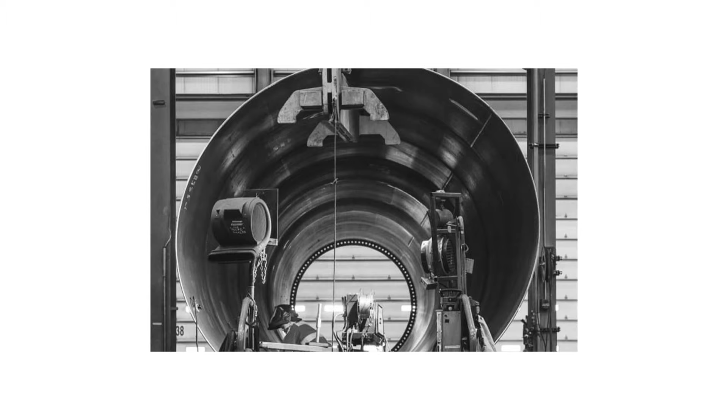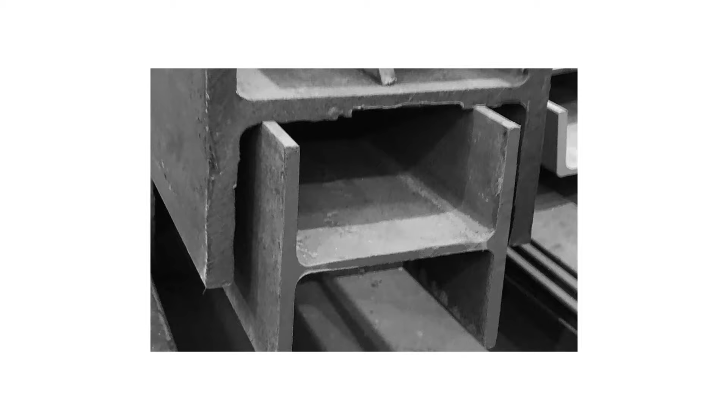Our thesis begins at this global scale, by exploring the complex networks in which steel is embedded. The goal of this project is not the impossible task of exposing every detail of these tangled histories, but to question steel's material dominance around the world. This investigation is conducted through the lenses of 3 steel beams. While these beams are unique in their constructions and their contexts, they are all part of the tangled web of steel.

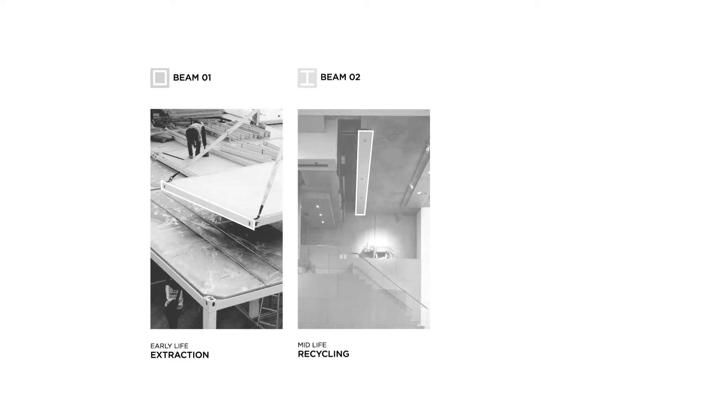The first story foregrounds geological and geopolitical issues of extraction. The second explores low-carbon methods of production and reproduction. The third examines the human and economic costs of the steel life cycle. We combine methods from scientific research and scenario planning to develop a speculation for each story, all sited 50 years in the future. These scenarios expand beyond the lenses of their singular beams to explore the complex networks of our ever-changing and challenging environment.

GBT 16270 was an extruded steel frame in the Huoshenshan Hospital in Wuhan, China, constructed as part of the government's response to the COVID-19 pandemic. It formed one of the many prefabricated panels that supported the 1,000-bed hospital, one of hundreds of large-scale infrastructure projects that the Chinese government undertook that year. China alone accounts for 51% of global steel demand, producing 996.3 million tons of crude steel, or 0.69 tons per capita per year.

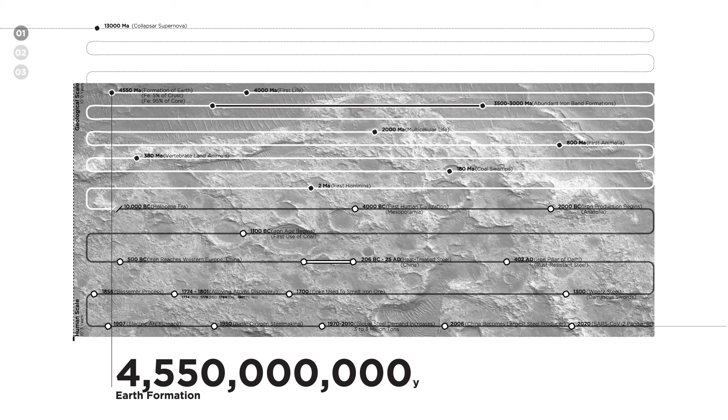16270 began a lengthy journey to unite itself 13 billion years ago, when a star 50 times the size of our sun collapsed. In the final hours of this supernova explosion, iron and carbon, the fundamental building blocks for steel and human life, were forged. 4 billion years ago, these elements were united with the formation of the Earth, but they were not so evenly distributed across it. Carbon, in the form of coal, is both an essential fuel and a key reactant in the fabrication of structural steel. In 2019, the steel industry accounted for 15% of worldwide coal demand.

2 billion tons of iron ore and 1 billion tons of metallurgical coal were used to smelt 1.7 billion tons of crude steel. By 2020, China had become the largest producer of coking coal in the world, generating over 4 billion tons per year. The coal for 16270 originated primarily in China's Haerwusu mine in the Inner Mongolia Autonomous Region, just one of the many water-stressed areas that supply 83% of China's growing coal demand. The remaining 10% originated in Australia, which supplies 55% of Chinese coal imports. Even before its formal creation, the raw material and power source needed to form 16270 had already traveled over 22,000 kilometers and passed through 5 customs checkpoints.

On a molecular level, 16270 crossed many more borders before it united in Wuhan. 6 months before the light gauge frame was formed, its backbone was extracted from the earth in the form of virgin hematite. The black rock was pried from a vein in Australia's Roy Hill mine, a minuscule fraction of the 930 million tons of iron ore that the oceanic nation produces each year.

Like most resources, 16270's ore moved along geopolitical channels. It was transported by BHP Group, one of the 4 companies that control 70% of the 2.35 billion ton global iron market. The ore was loaded onto a barge and shipped to China's largest port, the port of Shanghai. From there, the container was shipped 941 kilometers west up the Yangtze River. Finally, in the manufacturing center of Anshan, in Liaoning, 1 part iron united with 1 part coal.

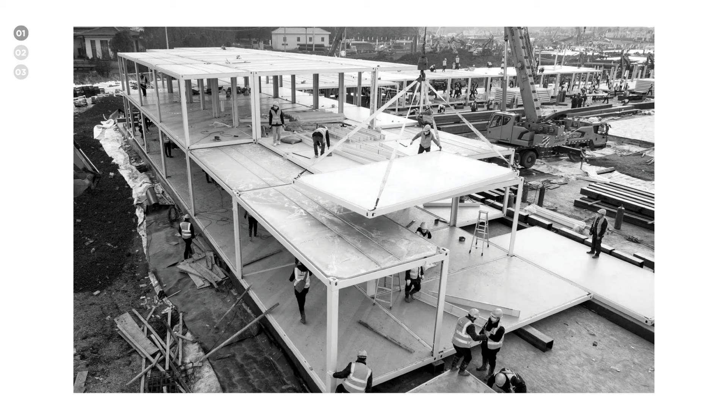After all of its molecules had been combined in Anshan, 16270 was dipped in a bath of molten zinc, searing its skin to protect it from oxidation. In Wuhan, cranes lifted it into the air, joining it to hundreds of other panels, a unitized system that would weather what would become a historic global pandemic. What would happen to the hospital in the coming years was, at the moment of its construction, unknown, but it was certain that global steel demand would continue to grow, and with it, a new era of territorialization.

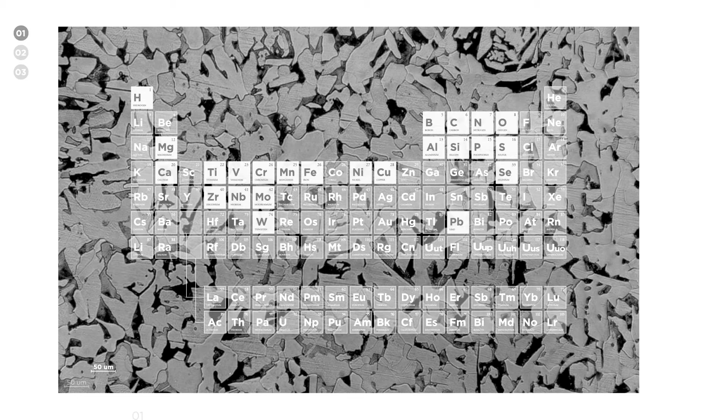16270 emerged at the dawn of the universe, but the materials of which it was composed were not universally accessible. The Steel Age was characterized not by a single atomic element, but by an amalgamation of the periodic table. No single nation could have unfettered access to all of the materials that make up this critical metal. Steel and its alloys were of the utmost importance to the tectonic, economic, and national security of nation-states, but this robust material was part of a fragile supply chain.

The only way to control the steel empire was to expand beyond currently defined boundaries, to colonize nation-states and the Earth as a whole. Between 2005 and 2016, over half of Chinese international investments were diverted to energy and mining sectors in foreign countries. Sub-Saharan African countries attracted 1/3 of these funds. 500 of Chinese mining enterprises were in Zambia alone, where, since 2008, Chinese investors were exempt from local and federal taxes. Throughout the 21st century, China Baowu Steel Group Corporation Limited, then only the second largest steel producer in the world, continued expanding its empire.

Fueled by fears that ore supplies would be exhausted by 2070, the conglomerate acquired 50 mines, supplying 13 types of metals and minerals around the globe. Eventually, the corporation amassed 99,000 square kilometers of land across 27 countries, a space the size of South Korea. On January 19, 2050, the National Assembly of Zambia formally granted 7 coal mines across the country to Baowu. The terms of the 200-year lease allowed for the new enclave territory to maintain 99% of the resources and profits obtained from the land. The Steel Age had ushered in a new kind of geopolitics, one based on resource ownership and economic systems rather than territorial boundaries.

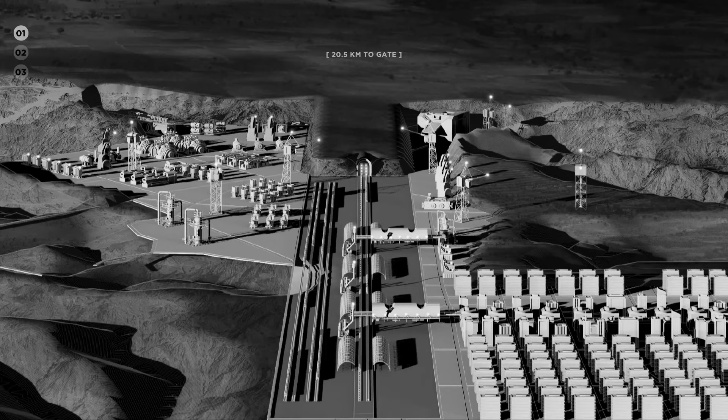In March of 2070, the Maamba mine, located just 10 kilometers north of Lake Kariba and adjacent to the small town of Sinazongwe, reaches its peak. Coal mining productivity has increased 30% over the past 5 years to 9.8 tons per miner per hour. In the sweltering heat of Sector 924B, nearly 65 meters underground, a metric ton of anthracite coal is extracted from the exposed seam. The coal is transported via conveyor to the adjacent processing plant, where it will be separated from rocks, dirt, ash, and sulfur.

Eventually, the coal will be loaded onto an automated tram, which will transport it 115 kilometers to the Choma distribution hub. From its incorporation in 2050 until present, Baowu has invested nearly $50 billion into infrastructure across Zambia, 90% of which exists within the boundaries of its own enclaves. The coal mined in this district will fuel Baowu's steel production, expanding the enclave into an empire.

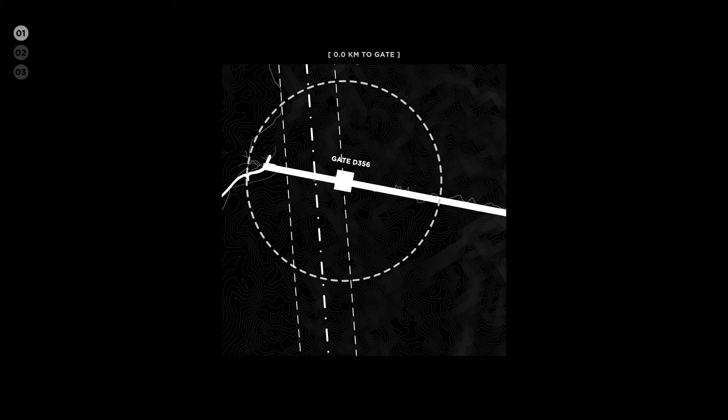Once on the tram, the coal travels 20 kilometers north to gate D356 at the border between Baowu Enclave 03 and the Zambian Zimba and Choma districts. Superficially, this boundary is intended to be fluid, constantly moving people and resources in and out of the enclave. The artificial line is demarcated on either side by a 1 kilometer wide uninhabited zone. But the land is far from empty. Almost immediately after the establishment of the UIZ, a series of informal settlements emerged to support the roughly 5,000 miners that would otherwise have to travel 50-plus kilometers into the district on a daily basis.

There's a tenuous standoff between the citizens of Baowu and of Zambia, a tense negotiation between economic investment and inequitable treatment. The UIZ is demarcated not by physical boundaries but by surveillance systems. A fleet of drones scan the area every 20 minutes, each drone ensuring, in 38.5 square kilometer increments, that the settlements neither formalize nor encroach on the official border.

Baowu's permeable border ensures that the flow of people into the enclave is as heavily controlled as the flow of resources out. Since its incorporation in 2050, occupants of the UIZ engaged in a series of architectural protests, all aimed at subverting the surveillance state along the D356 highway, which cuts through the center of Sinazongwe and passes through the Mamba and Kolom coal mines.

Only 1 kilometer outside of the mine, a Mars-hued liquid streams into the landscape. When the extracted anthracite is exposed to the air, sulfide minerals oxidize and release acid and heavy metals in the form of toxic mud. The enclave generates 500 tons of this sludge a year, which contains iron, copper, and 17 rare earth elements.

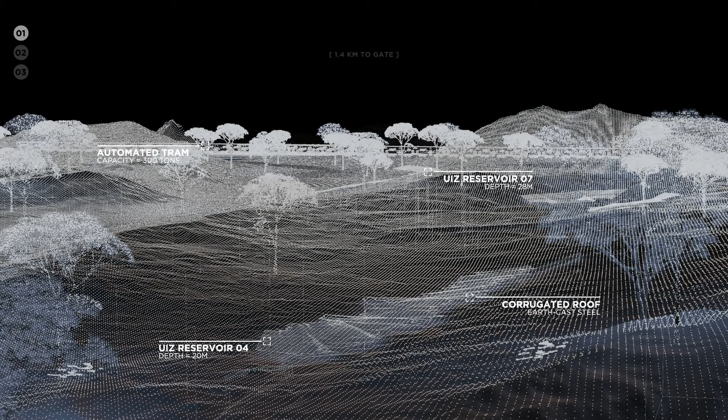The surreptitious, supplemental water in the UIZ's reservoirs is barely usable, coated in a thin sheen of oil and coal dust. But there is no alternative for occupants of the UIZ, because the landscape has been diverted in service of the mine. As the cargo train rushes towards the Choma hub, it leaves behind a thick smog of coal dust in the air.

In Sector 941C, before the dust can settle on the ground, it is captured by a screen network, rings of finely woven mesh that remove 85% of coal dust and sulfuric impurities from the air. From the aerial views of the surveillance drones, these circles simply look like outcrops in the landscape. The netted zones, which capture 20 grams of pollutants per square meter, provide shelter from the environment of the mine and enable the growth of crops which would otherwise have withered in the polluted air.

The mesh is supported by a lightweight steel truss. Paradoxically, it is still embedded in the system of production that it attempts to subvert. The incorporation of Baowu 03 established a mining complex within an enclave territory, within a traditional nation-state, within a larger capitalist system. Vestiges of the enclave scar the landscape. The settlement serves as an informal critique of its autocratic government, of the proliferation of extractive landscapes, and of ownership of resources. As of 2070, there are still 200 years of proven reserves left in the mines. It is certain that the production cycle will endure.

These follies are crucial to the survival of the settlement, but they also act as monuments to the loss incurred by geopolitical, geological exploitation, loss of life, of landscape, and of culture. The projects are unique in program but united in typology, a series of architectural masks that obscure their true function. They employ the materials of the new age of empires in order to hide from the geopolitical processes that enable their very existence.

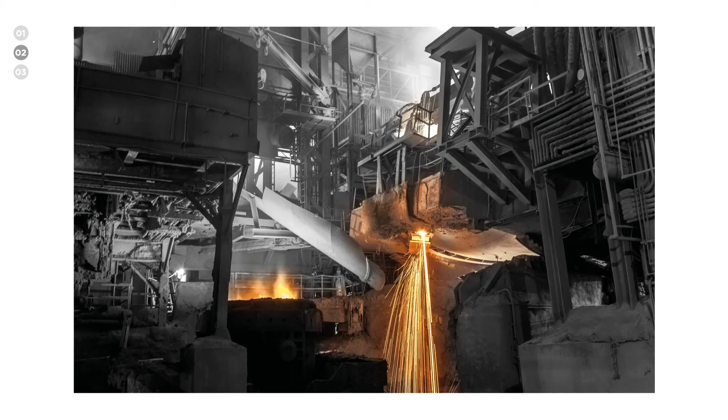A 992 was a custom steel H-beam in New York City's Folk Art Museum. It supported the second-floor landing, providing visitors with a stable platform to view the museum's iconic bronze facade. The high-strength, low-alloy columbium-vanadium structural steel member was produced out of 3 flat roll sheets welded together at ArcelorMittal's Coatesville, Pennsylvania factory.

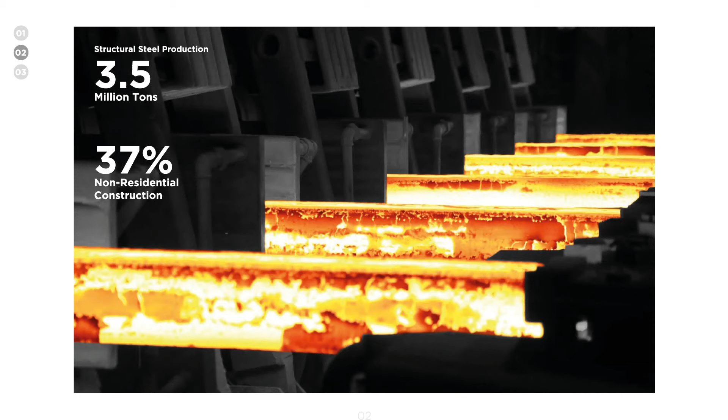The United States produces 3.5 million tons of structural steel annually, nearly 11 kilograms per person, in 12 structural steel mills across America's Rust Belt. 37% of all of this structural steel ends up in non-residential construction, like the Folk Art Museum. On average, 69% or 61 million tons of US steel is produced from ferrous scrap. Recycled content for the structural steel is even higher, at 89%, but there are still carbon costs to this low carbon method of production.

A 992 had lived many lives before it was a beam. 80% of its composition came from the ferrous scrap. The remaining 20% of its composition came from prime steel shavings brushed off a factory floor. All these fragments were fused together in the electric arc furnace in Coatesville, Pennsylvania, which processes 900,000 tons of steel a year.

Once A992 was fabricated, it was trucked to Eastern Steel Corp in Brooklyn, one of 35 steel service centers in the New York area. Over 70% of all the structural steel used in construction projects in the United States flows through some 1,120 service centers, which act as large warehouses. After only a few weeks in the service center stockroom, A992 was cut to length and trucked to 45 West 53rd Street, Midtown Manhattan, where engineers estimated it was supposed to stay as long as half a century.

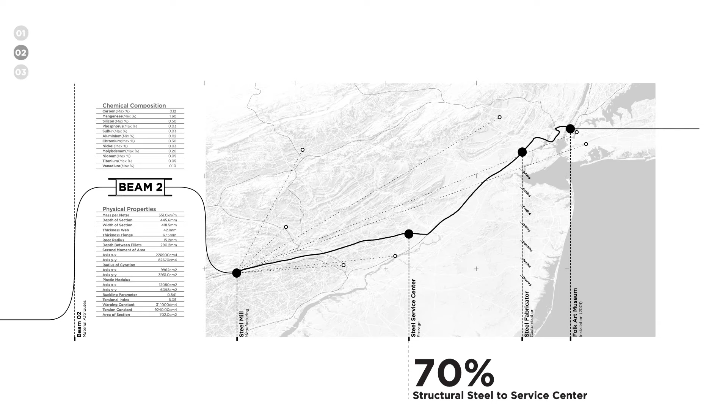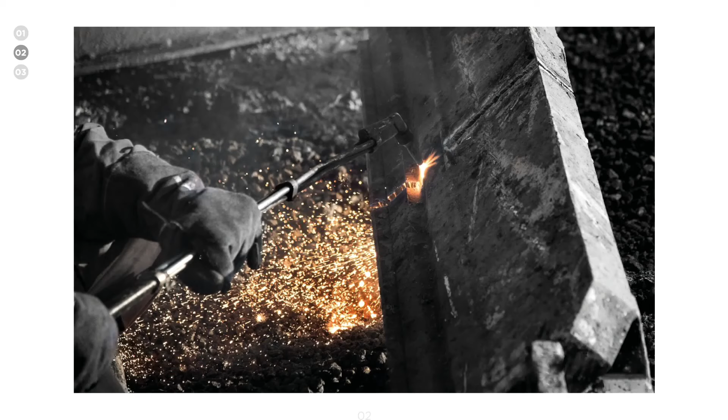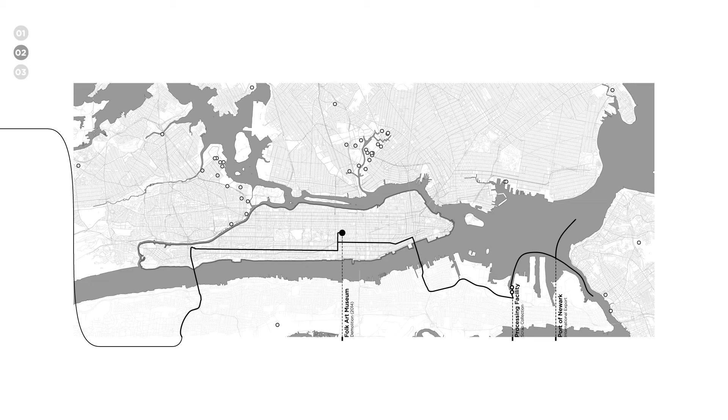But in 2014, A992 was moved yet again. New beams arrived to support scaffoldings for workers to painstakingly dismantle the bronze facade panels. Oxyacetylene torches and reciprocating saws descended on the skeleton of the museum, severing A992 from its cross-bracing members. The remnants of the museum were loaded onto a flatbed truck and delivered to a metal scrap processor in Jersey City. A992 had become one of the 2.4 million tons of steel waste that New York City generates every year.

Of the 100 tallest intentionally demolished skyscrapers in history, 23 are in New York. 60% of them were steel structures. They lived for only 41 years, while the average lifespan of structural steel is 52 years. A992 lived to be 13. Even after just 13 years, the alloys that constituted the complex specification of A992 were lost. The beam was simply dragged to a scrapyard, where it was stripped of its cultural and technical identity. A992 would live again, but only after the wholesale destruction of its inherent self.

HS 720449 was melted down in an electric arc furnace owned by the Habas Group, one of the largest steel scrap producers in Turkey. The alloying atoms that had imbued A992 with its strengths were now considered toxins, too volatile to be recycled. It is unknown what happened to the rare minerals that were liquefied in the furnace, but the raw iron was extracted and turned into rebar, Turkey's most manufactured steel product. 27.5% of Turkish steel is exported as rebar. In 2014, 27.8% of this rebar was shipped regionally to the United Arab Emirates and to Egypt, but 20% returned to the United States.

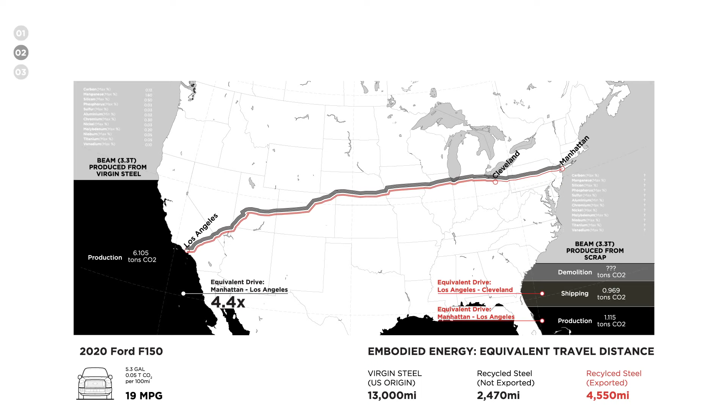A992 weighed only 3.3 tons, a fraction of the 87.9 million tons of steel that the US was producing per year. Steel was lauded as being 100% recyclable, but moving even this comparatively small mass accrued a heavy carbon cost across the many thousands of miles it traveled in its life.

By 2020, half of all waste generated in New York City annually, roughly 6 million tons, was construction and demolition debris. In order to be recycled, steel was shipped to scrap processors and transport stations where it lay in wait for the highest bidder. Like A992, many pieces of structural steel traveled the globe to find a new home, a new economy willing to mass produce large amounts of low-quality steel. In the continuous reforging that followed, they were doomed to lose the precious alloys for which so many landscapes had been mutilated.

In order to build upon the city's 2020 goal to eliminate landfill waste within the next 30 years, the New York City Council enacted a radical piece of legislation. Bill S9502 banned the export of waste beyond borough boundaries, to take effect by January 2040. Manhattan, which generated astronomically more waste than it received, was disproportionately affected.

By 2070, Manhattan had become the new epicenter of urban recycling. At 0100 hours, a shadow passes over Bryant Park. An exoskeleton winds its way up the W.R. Grace building. Manhattan's latest rezoning has spelled certain doom for the iconic structure at 1114 6th Avenue, which will be the 27th mid-century building to be demolished in the last 3 months.

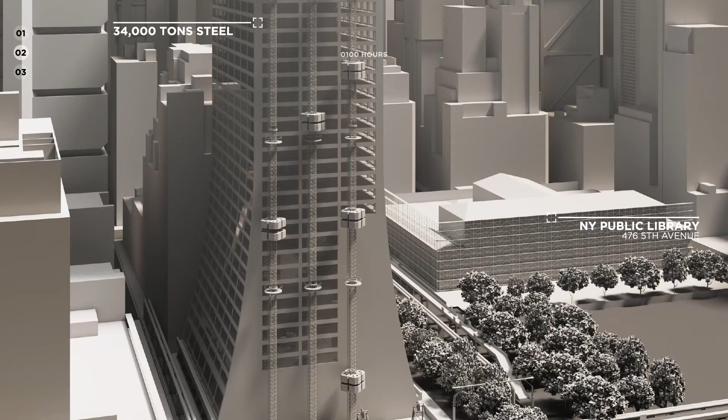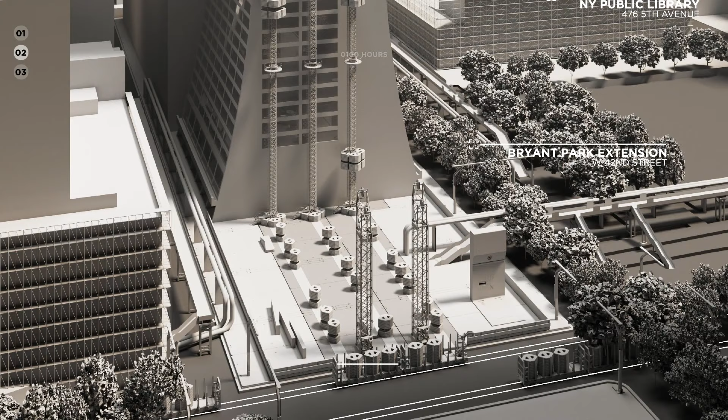In the early hours of the morning, robotic claws rip the building limb from limb. Curved and straight steel beams land on the back of a waste hauler, operated by one of the city's 250 public waste contractors. On this crisp March morning, over 1,200 haulers are roaming Manhattan's even-numbered avenues, blanketing the peninsula in a barcode of alternating pedestrian and supply thoroughfares. As the hauler continues up 6th Avenue, beam C17 jostles against an old Bertoia chair.

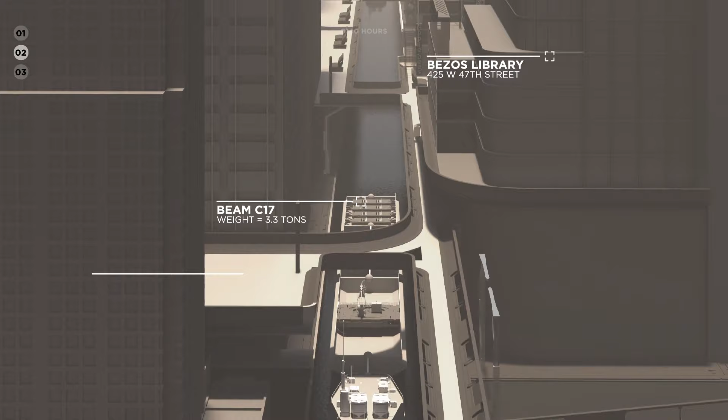After 40 minutes, the beam has reached the midpoint of the 47th Street Canal, one of 6 water wasteways that cuts 10-meter horizontal bands across Manhattan. Canal 47 begins at what was once the headquarters of the former United Nations, now the site of Amazon's 4th New York office. The waterway continues west through Hell's Kitchen, a 3,700-meter-long connective sinew between the residential and corporate neighborhoods. During the day, the area is a hub of pedestrian activity. Noise floats down from the roof terraces that form the extension of the High Line.

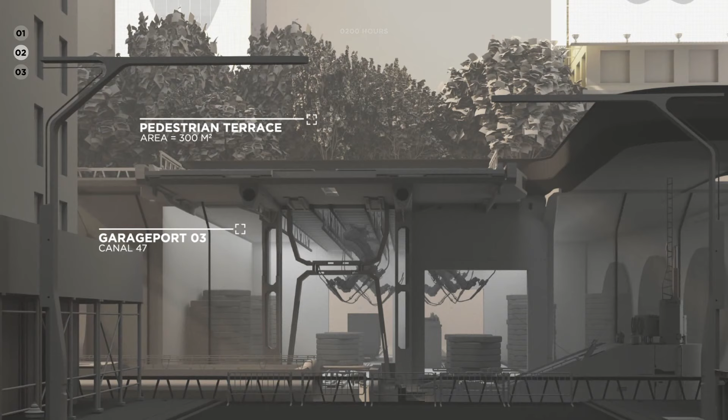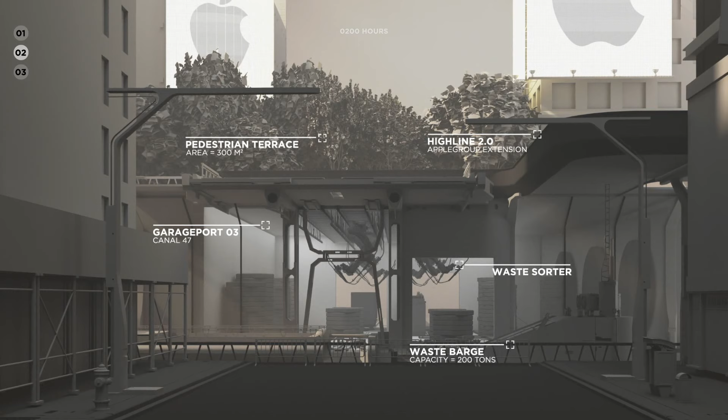But it is past the 10 p.m. curfew. The 602 digital turnstiles will not scan pedestrian access codes until the sun rises. At 0200 hours, the hauler docks silently at one of the 8 garage ports on the south side of the canal. Under the terrace and under cover of darkness, 28 tons of waste from the Grace building are sorted by material. 60% of the waste is structural steel, to be classified as either reuse or recycle and then loaded onto a color-coded barge that will travel west towards the Hudson River, the western artery of the wetwork. The 100-foot barge is just one of dozens, a parade of segmented bodies dotting the green water of the canal.

At 0400 hours, a crane lifts the 2020 Toyota Camry 200 feet into the air. It was among the last private vehicles to exist within the city. The car is loaded onto the vessel, now a self-sustaining sorting facility that processes 28,000 tons of waste every day. Industrial jaws tear doors from chassis, limb from body, continuously deconstructing the object as it travels 16 stories down the gravity-fed honeycomb. Robotic arms sift through the pieces of flesh, sorting them according to size and material.

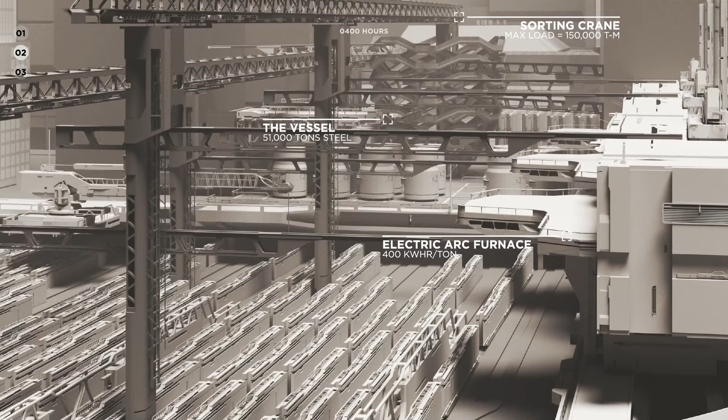In the steel section of this forensic lab, a small piece of the Camry shell is extracted and inserted into the Tesla mass spectrometer, where it is analyzed for its molecular composition. 6 centiseconds later, more claws grab the shell and divert it to one of the 452 conveyor belts radiating from the lab. The shell lands atop the frame of a forgotten treadmill and the 3.3-ton beam C-17. While distinct in form, these three artifacts are nearly identical in chemical composition. C-17 then passes over 30 active tracks at Hudson Yards to arrive at the electric arc furnace. Once nothing more than a parking lot, the 2.2-acre site has been transformed into Structure Inferno. Today, along with 120,000 tons of steel, the beam will be reborn again and again as the city relentlessly melts and remolds its steel.

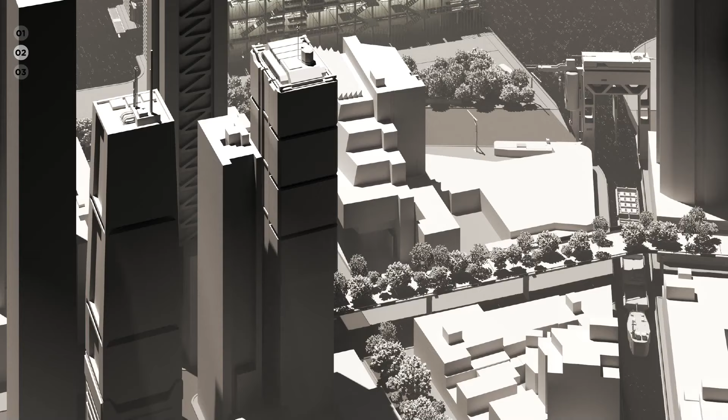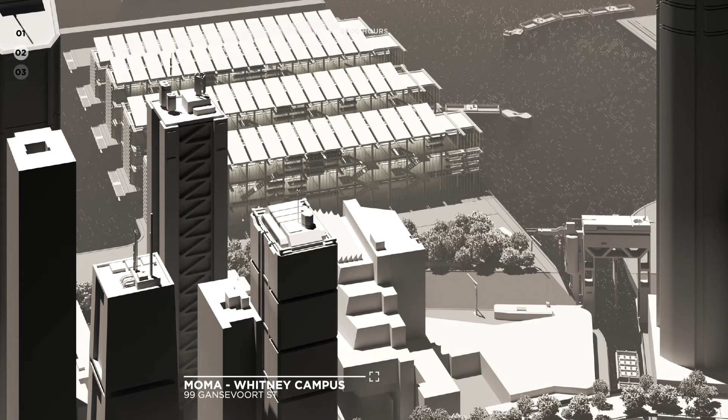0700 hours, a container vessel docks inside a warehouse at Pier 53, one of four 500 square foot holding pens for fresh steel. The steel is sorted according to composition and form, and stored in this climate-controlled facility alongside overflow art storage for the former Whitney Museum, which was acquired by MoMA in 2047. An automated system continuously evaluates the accessioning and deaccessioning of steel. A new H-beam is rejoined by a forebear, one that was allowed to bypass the furnace. Only a slight color difference indicates their distinct path.

This morning, 8,293 beams stare out at the river, at a grid of vortex turbines that populate the Hudson, energy slaves to the 400 kilowatt-hour per ton furnace. The beams are protected from the corrosive air by the warehouse's synthetic skin, stretching over a screen made from 12,000 recycled steel rods. Soon, this steel will be called upon, dragged back to the water, to serve the counterclockwise cycle of unbuilding and rebuilding in this mega metropolis.

By 0900 hours, a steel barge passes under the bridge at 61st Street. The bridge is a twin of that at Canal 47, Manhattan's answer to repairing its 100-year-old infrastructure. Each bridge is part of a recognizable set with bespoke connections to the existing buildings that support it. Simultaneously unique and generic, this replicable structure will save the city nearly $50 billion over the course of the next century.

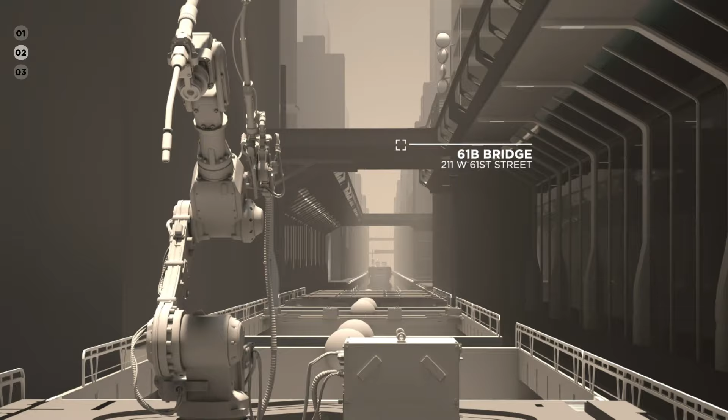Technically, these net zero processes are considered green, and in 2080, the peninsula is designated the first ever LEED Palladium city. In 2020, the story of a single steel member is told over the course of a decade. By 2070, the reincarnation of a single steel member has been compressed into a single day. Manhattan is now the epicenter of an epidemic of melting and remolding steel.

GT 1499 was part of the Rana Plaza retail and apparel manufacturing complex in Dhaka, Bangladesh. By 2012, the number 6 reinforcing bar, nearly 8 meters in length, was combined with 246 identical pieces of low-grade carbon steel, a rebar cage encased in 8.18 tons of concrete. Because of its production efficiency and economy, reinforced concrete was often used in the Global South, which consumes just 23% of finished steel, despite holding 57% of the world's population.

But the origins of 1499 were more complex than its simple form. Just 5 years earlier, it had been part of the 246,000-ton container ship Eurus London, which had sailed under the British flag since 1992. When the Eurus reached the end of its life, it, along with 674 ocean-going vessels, was sold to a scrapyard to be dissected rather than reused.

Most of these ships landed on the shores of the Indian subcontinent, which accounted for 95% of gross scrap tonnage worldwide. In 2012, the 333-meter-long Eurus, which is one of 236 vessels to end up in a Bangladeshi scrapyard, beached at the Ferrous Steel Corporation shipyard in the Chattogram division. At this point, Bangladesh was recycling 7.52 million gross tons, or 34.5% of global ship scrap each year.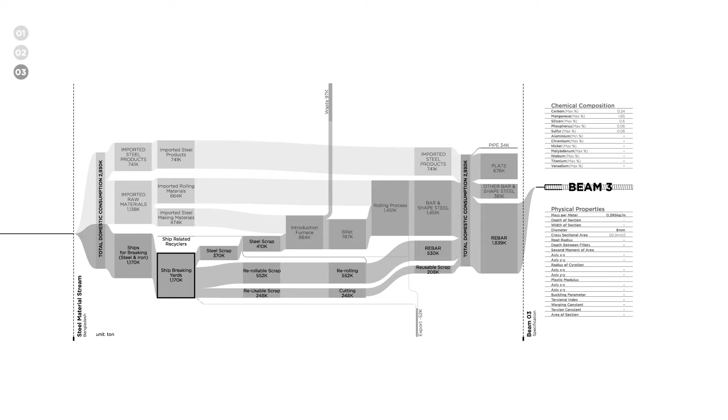Geographical features like the flat intertidal zone and stable weather patterns, coupled with low environmental and labor regulations, made the Bay of Bengal an ideal berth for 1499. Chattogram alone handled 20% of the world's total shipbreaking and produced most of Bangladesh's 5 million-ton steel demand. The Ferrous Steel Corporation was just one of 148 registered shipyards in Bangladesh, all of which were located on the 18-kilometer-long Sitakunda Bhatiary coastal strip in northern Chattogram.

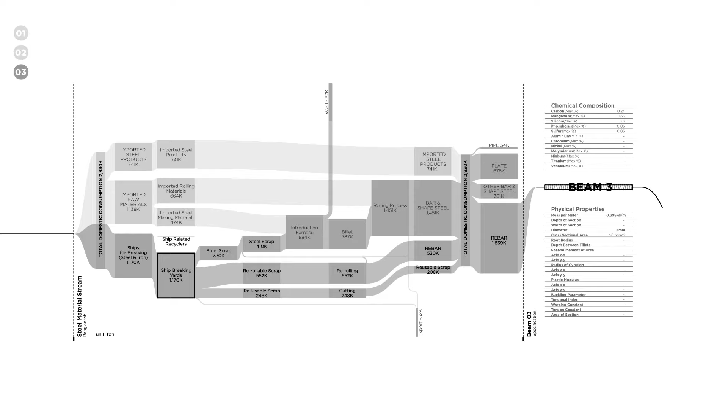It was from this 4,000 square meter space, which generated 60 to 80% of all the steel supply in Bangladesh, that 1499 would emerge. Like 45% of all container ships, the Eurus and 1499 would be reincarnated as rebar, encased in a concrete sarcophagus.

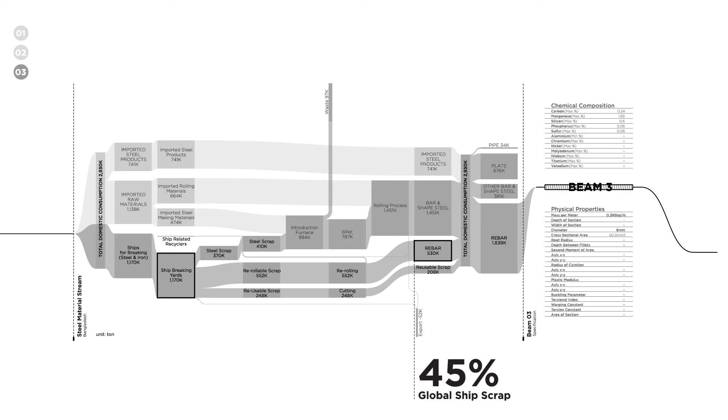Of the 45,000 ocean-going ships in the world, approximately 700, or 1.55%, are taken out of service each year. At 16 years of age, the Eurus was nearing the average lifespan of a container vessel, and, as the cost of insuring and maintaining the aging steel ship mounted, its value shifted from the goods it was carrying to the steel body of the vessel itself.

At 246,000 tons, the same ship, which sold for almost $46 million in Bangladesh, would have fetched only $29 million in Turkey and $21 million in China. This discrepancy was due to the minimal infrastructural requirements, cheap labor, and high demand for recycled steel in a region with virtually no iron ore reserves.

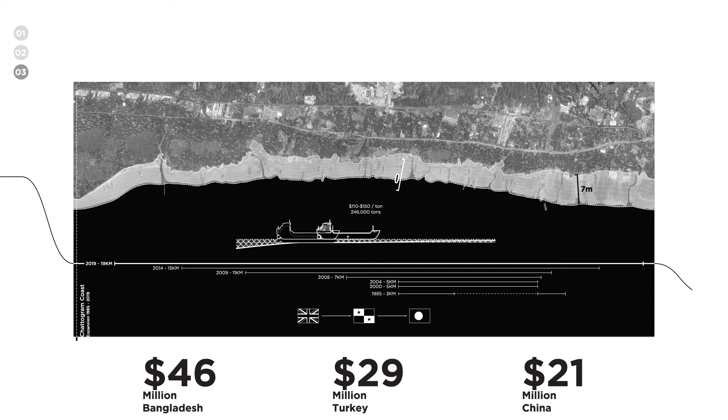When waters rose with the spring tide on March 10, 2012, the Eurus's berth would signal its death. The massive tidal range of Chattogram, nearly 7 meters, allowed the ship to beach itself without the use of elaborate and expensive dry docks. The ship had a dead weight of nearly 250,000 tons, 95% of which was steel. But this steel was coated with 50 tons of paint containing lead, cadmium, organotins, arsenic, zinc, and chromium. Breaking a ship the size of the Eurus would flood the ground with 240 tons of molten steel. In the same process, roughly 5 tons of paint would be burnt in open air.

Throughout its tenure, the Eurus had carried not just cargo, but 7.5 tons of asbestos and 881 tons of residual oil. This was just a fraction of the 79,000 tons of asbestos, 69,200 tons of toxic paints, and 240,000 tons of PCBs that Bangladesh was estimated to have imported between 2010 and 2030 in the form of decommissioned ships.

Once beached, oxyacetylene torches dissected the Eurus's body, dividing it into truckable parts as demanded by their purchasers. Mechanical cranes lifted heavy equipment such as boilers, motors, capstan stockings, while human arms carried metal plates, bars, or pipes to nearby stack yards. These arms were just some of thousands, between 22,000 and 50,000 direct laborers, and 100,000 and 200,000 indirect laborers, who were employed in the Bangladeshi shipbreaking yards.

Here, on the shores of the Chattogram district, without respirators, helmets, or even shoes, workers endured risks ranging from toxic gas explosions to falls from the upper decks as high as 70 meters. Hatches contained flammable and explosive gases during cutting. Tubes carrying oxygen lay unprotected on the ground, vulnerable to falling objects and sparks from cutting torches.

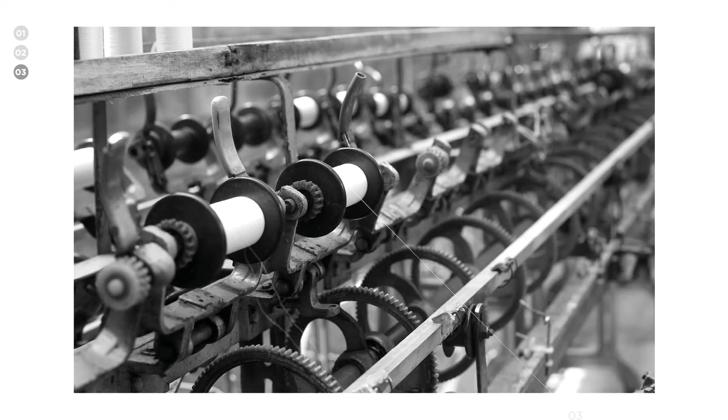The severed steel plates were shipped to one of 350 re-rolling mills along the Dhaka-Chattogram highway. Eventually, they made their way to Abul Khair Steel, the largest of the 9 sheet steel manufacturers in Bangladesh. The pieces were of high enough quality that they did not need to endure the heat of an electric arc furnace. Instead, they were sheared to size and reheated through a simple coal-fired furnace, and eventually rolled into reinforcing bars, including 1499. 1499 claimed thousands of lives by the end of its own.

On April 24, 2013, the 7th floor of the 8-story Rana Plaza garment factory began to crumble. When the overburdened and structurally unsound garment factory ultimately collapsed, it killed over 1,100 people. But the cost of reclaimed steel is undoubtedly much higher. In 2019 alone, 26 workers died, while over 150 were officially reported to be injured in the Bangladeshi shipbreaking industry.

Shipbreaking was responsible for the extinction of 21 fish and crustacean species, and the endangerment of 11 other species in the region. An estimated 60,000 mangroves were cut down in the 14-kilometer stretch of coastline near Chattogram, leaving the coastline vulnerable to typhoons and floods. Shipbreaking was a paradox for the region, both an economic lifeline and a literal death sentence. This relentlessly degraded steel was part of a consumer cycle that valued economic consumption over human lives.

By 2020, over 1.7 billion people were part of the consumer class, a group characterized by the accumulation of non-essential goods like those produced in the Rana Plaza factory. 90% of the world's trade was carried by sea on over 60,000 merchant ships. Global seaborne trade volumes exceeded 10 billion metric tons and an estimated 53.6 billion gross ton miles. After a 2018 agreement by the International Maritime Organization, 170 member states agreed to reduce their greenhouse gas emissions by 50% by 2050. But the efforts to green the shipping industry were countered by an already fatigued planet.

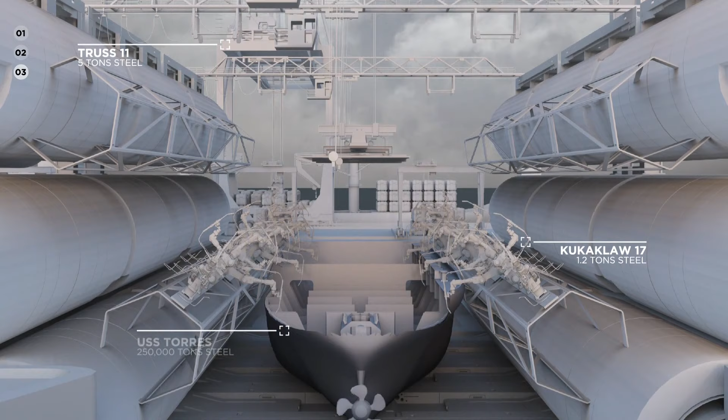Vitoya processes nearly 100 ships per year, almost 10% of the global total. Technically, the island is still uninhabited, a paragon of environmental stewardship and laborless industry.

72.3, -157.6 degrees. 3,300 kilometers across the Arctic Circle is the Chukchi Sea, where an artificial archipelago marks growing territorial claims in the region. Rising waters and changing coastlines have exacerbated territorial disputes in the 200 nautical mile exclusive economic zones in the Arctic Ocean.

In this space between the United States and Russia's Wrangel Island, the -1.6 degree water is dotted with ships, a stationary fleet that every day pumps 200 tons of sand from the ocean floor to supply the expanding atoll. 2 to 3 ships the size of the Lovecraft will pass through this water, murky with sand plumes, every year. US government subsidies will lead them to the shores of the Utqiagvik archipelago, where they will be broken and rebuilt into the fabric of the islands themselves.

The steel extracted from these vessels supplies critical infrastructures to remediate oil spills, rescue damaged ships, and combat human trafficking in the region. But these islands are benevolent only at face value. Increased traffic has spurred increased pollution and disruption of the natural environment. Rather than recycle, the archipelago relies on external resources to survive, importing nearly $17 million worth of food and fuel each year.

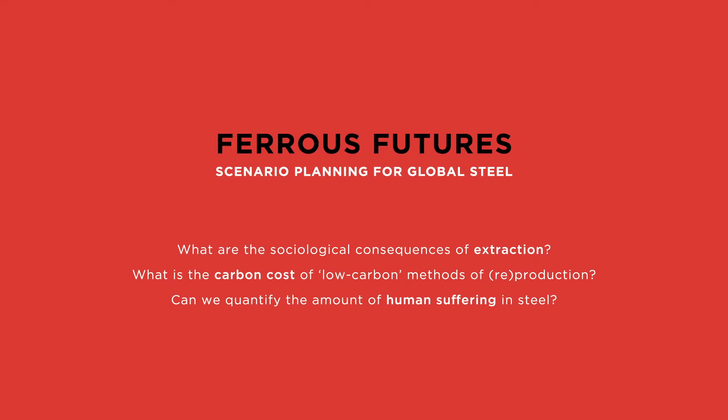The scenarios we've outlined today acknowledge that extraction is not just a geological, but a geopolitical concern, that our current recycling practice is driven by capital rather than climate, and that life and livelihood is the true cost of consumption. They begin to investigate the spatial outcomes that might arise from an alternate approach to steel resource control, waste streams, and consumer culture. As populations grow and urban centers densify, so too will our material dependence.

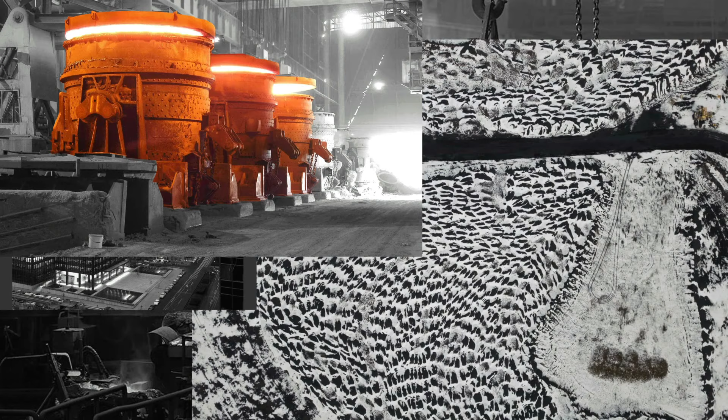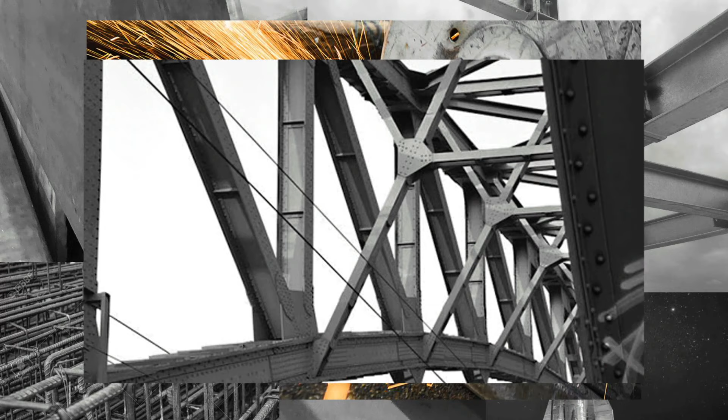These three scenarios provide plausible futures that operate within the confines of the current capitalist system. They highlight the absurdity of our current practice without becoming absurdly unrelatable. The goal of scenario design is not to produce an alternative material, but to question the consequences of our current practice, while acknowledging that we, as designers, operate within a larger geopolitical context. While there are many disciplines involved in the global steel industry, architecture is still culpable. At 56%, the built environment is the single largest consumer of steel.

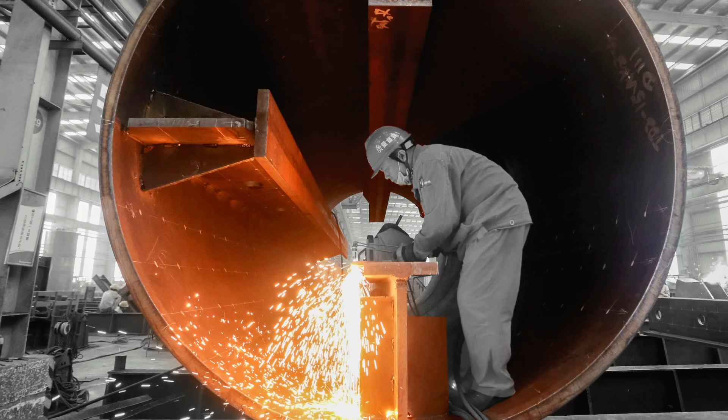In imagining these scenarios, we reconstruct our material culture and the effects that these speculations might have in the complex networks in which this material is embedded. They allow us to prepare for the future by providing a context for speaking about the unspeakable. While this thesis questions the pervasiveness of steel in the built environment, it is our hope that this reciprocal research design methodology could be expanded or applied to other issues of global complexity.